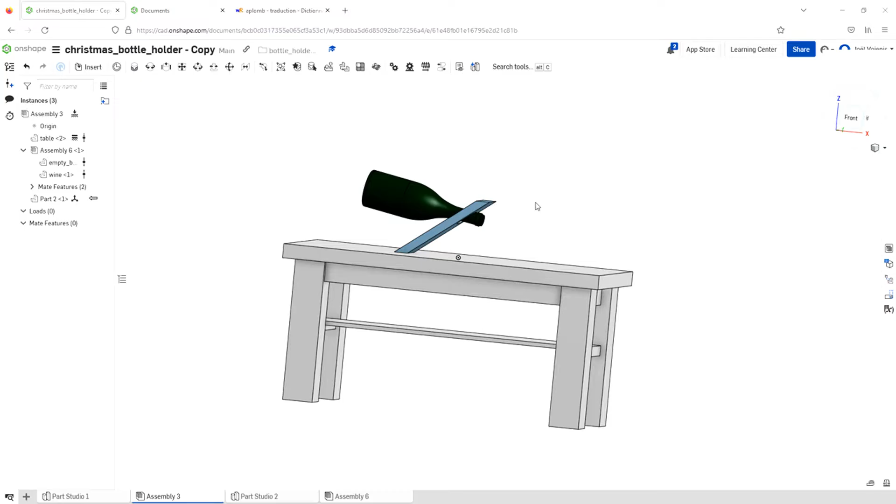In this video, we are going to see how to build a bottle holder like this part.

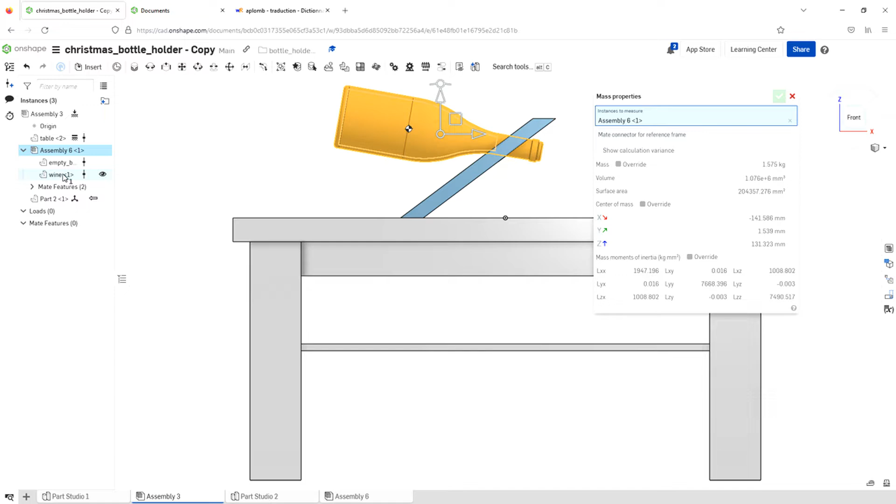There's an equilibrium because when you choose the front view, you use the display mass property button. You select the assembly composed of the empty bottle and the wine, and you add the bottle holder, the center of mass stands right to the vertical of this surface. Otherwise, there wouldn't be equilibrium, it wouldn't be balanced.

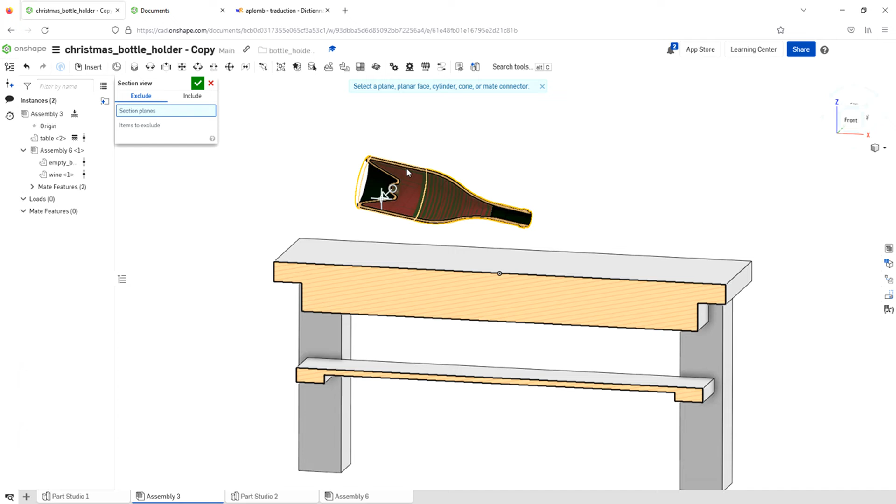Use Onshape to create a bottle holder. The first step is to position the different parts. So the table is fixed, as you can see this little symbol, and the assembly containing the empty bottle and the wine that we can see when you use, for instance, the section view. So there's a wine inside, you can see here.

So the bottle and the wine is a sub-assembly, so it can be moved using the arrows, depending on how you want your bottle to behave.

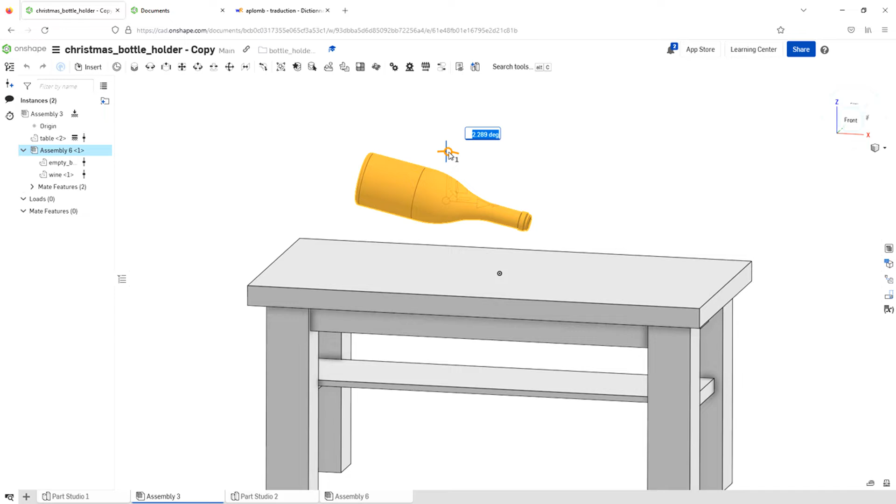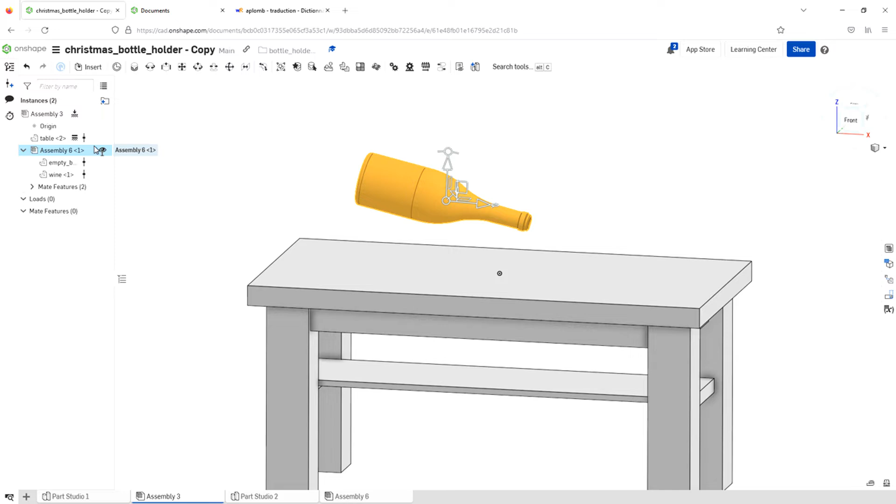Now that the bottle has the good position, it looks like it floats in the air, we are going to build a new part studio using this icon. Let's choose the origin here. And we enter a new window where the different parts and sub-assemblies are transparent.

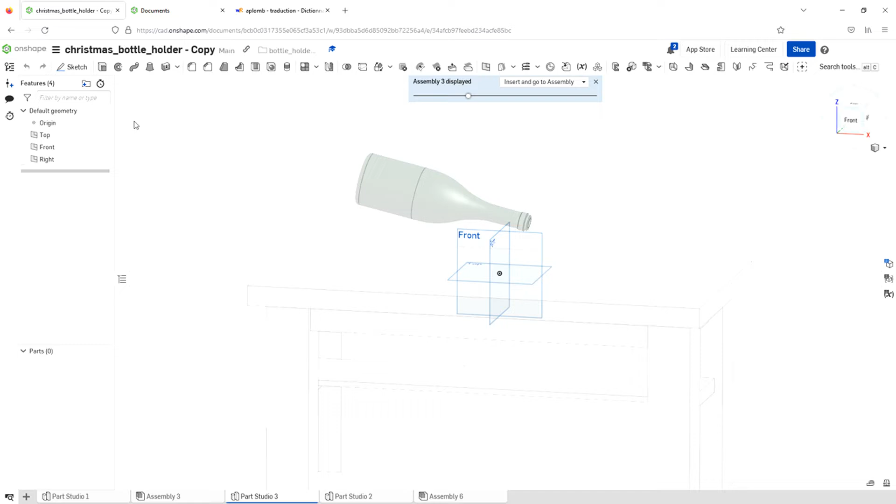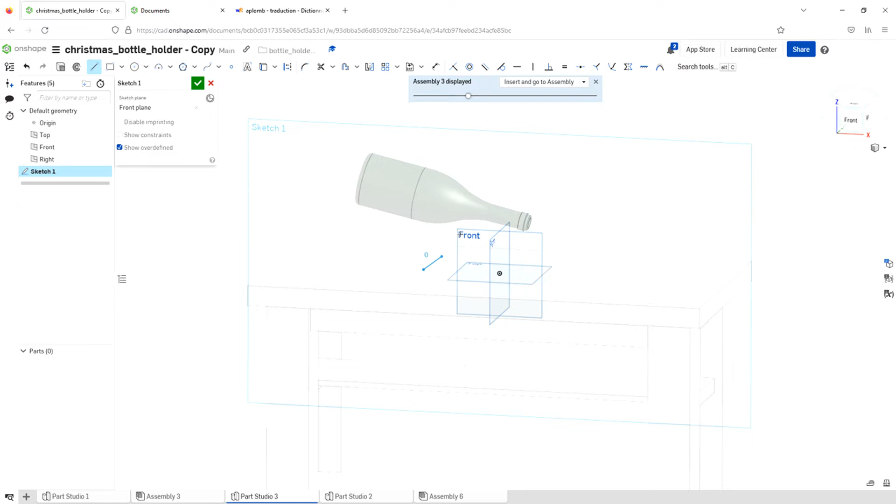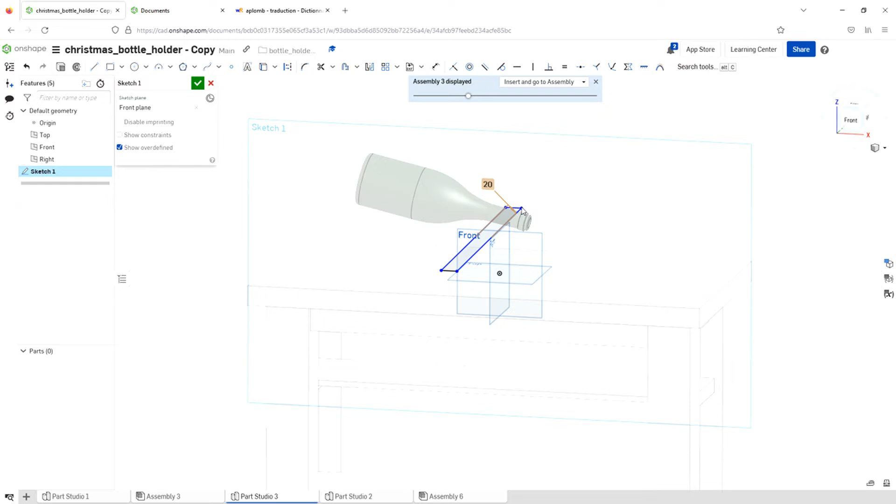We start a sketch, choosing the front plane and drawing segments. These segments must be parallel, so you can choose this function and select the two segments. You have to be sure the width is 20 millimeters, otherwise you change using the dimension button. Now you can change the position of the shape.

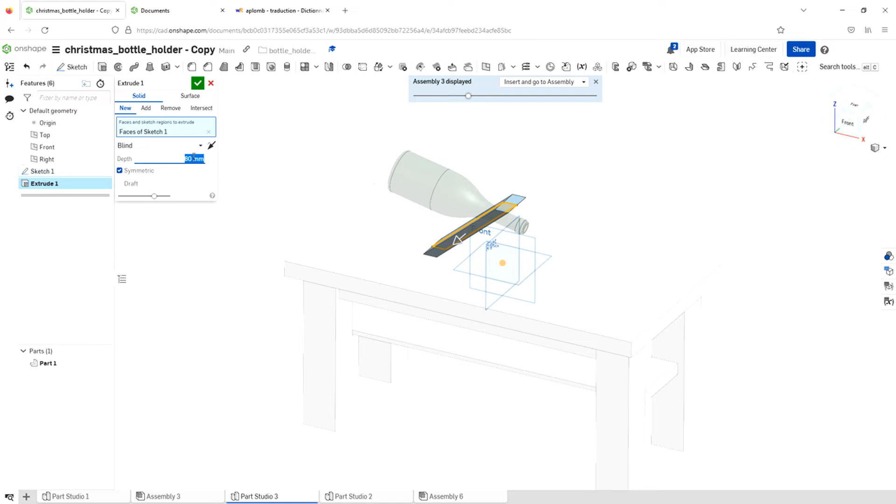And we are going to create a volume using extrude, clicking on symmetric. Let's choose, for instance, 80 millimeters width, and the volume is done.

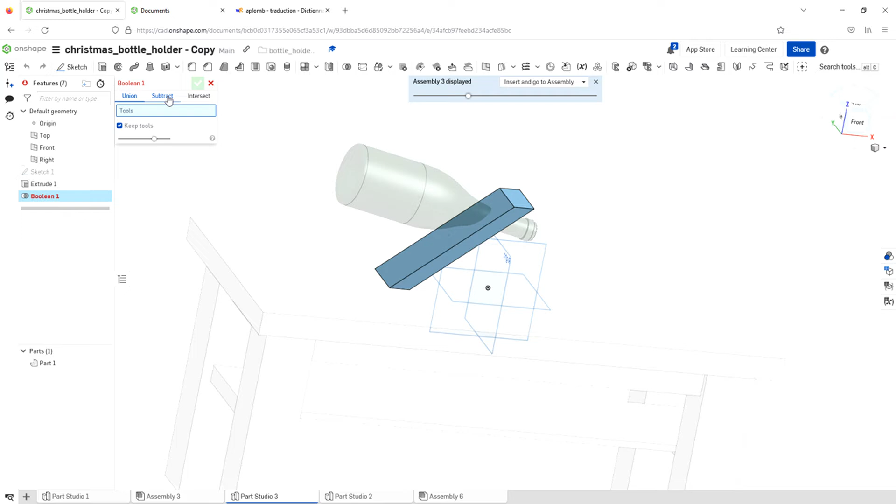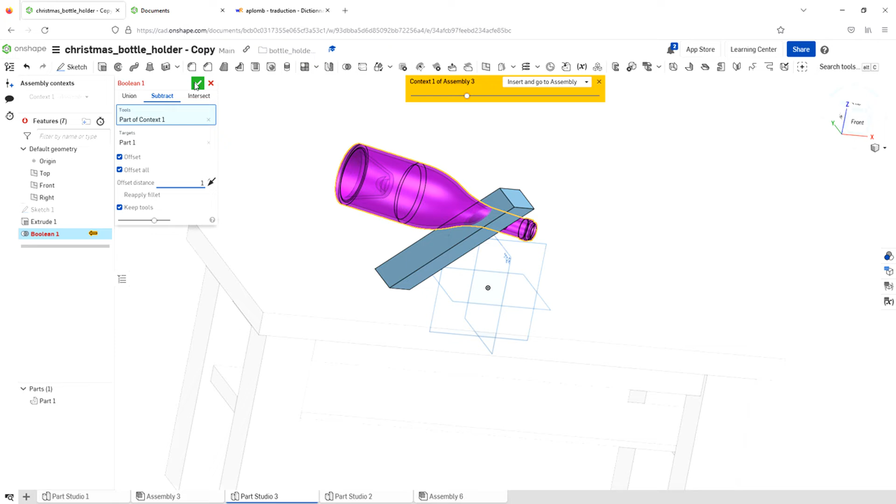The next step is to create a hole, allowing the bottle to go inside this plank. It should work with this function, using the subtract menu. The tool is the bottle and the target is the plank. Unfortunately, it doesn't work. Let's see. We choose an offset of all the dimension in order to give room to the bottle. But there's an error message here. Doesn't work. So we clear this function and we have to use a trick.

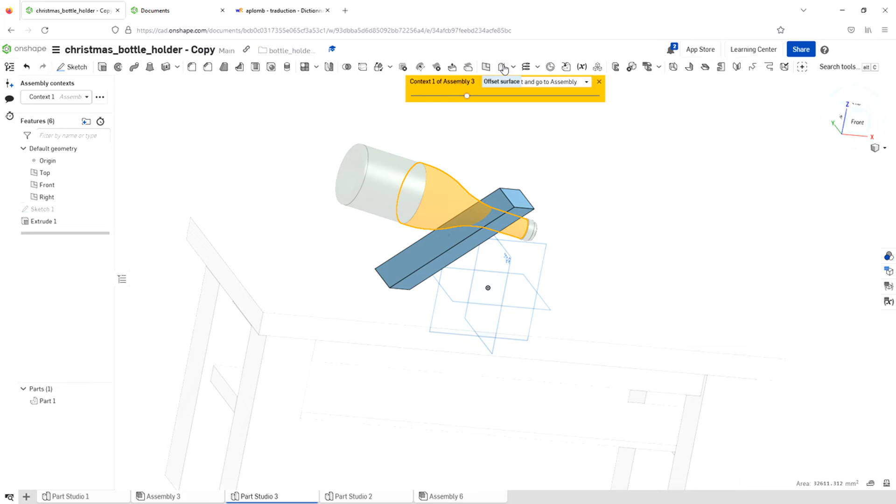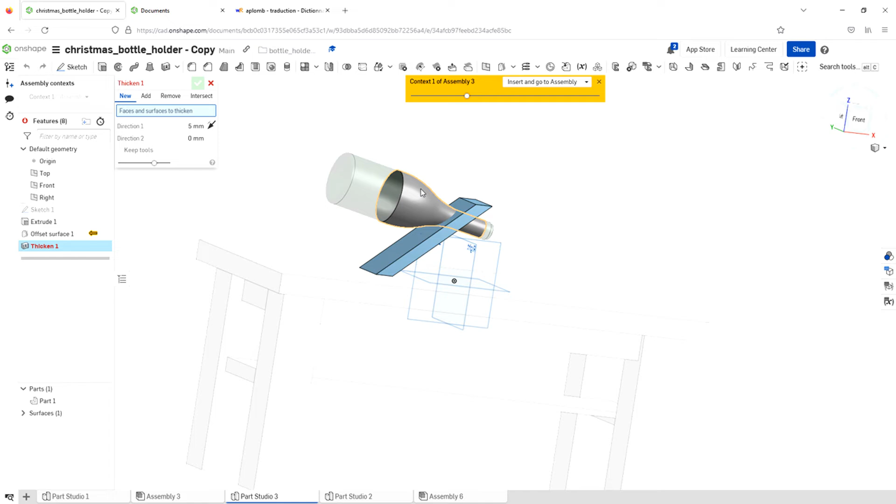The trick consists in making a surface out of this surface using, for instance, 1 millimeter offset in order to give room, and we are going to give thickness to the surface. And I will create a volume out of this surface using the thicken icon. So we have to choose this surface, choose the opposite direction, and let's say 5 millimeters would be enough. So you can see there's a volume here.

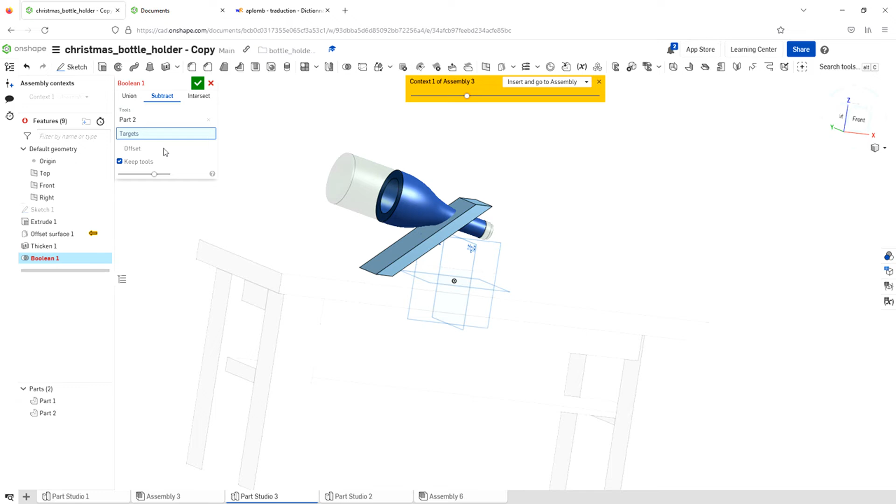Now it would work with the Boolean function. So the tool is still the thicken number 1 and the target is here. I think it's working, because if you hide this part, you can see there's a hole inside.

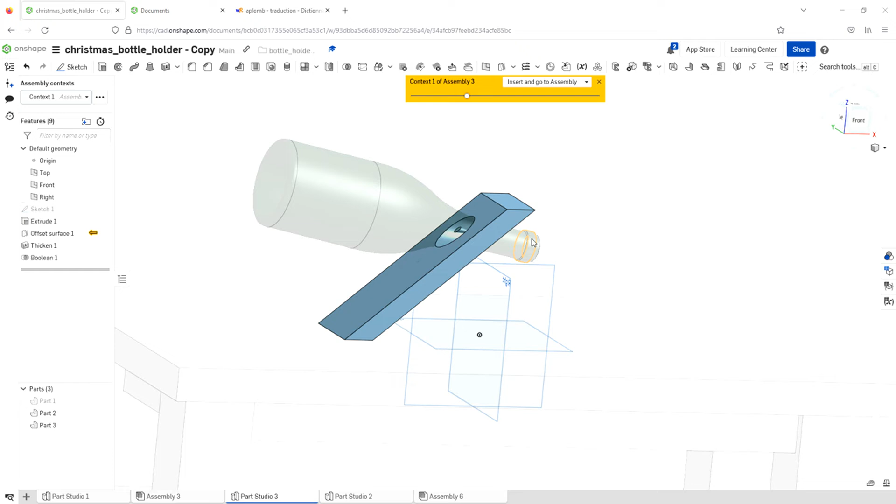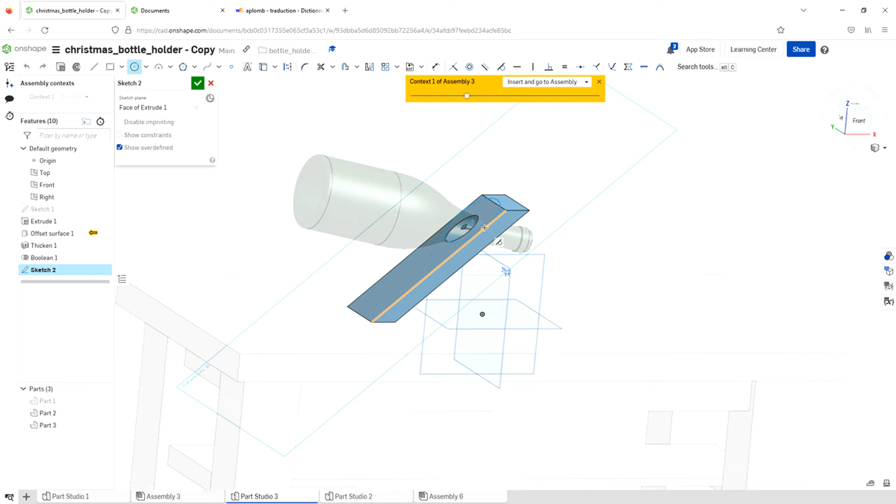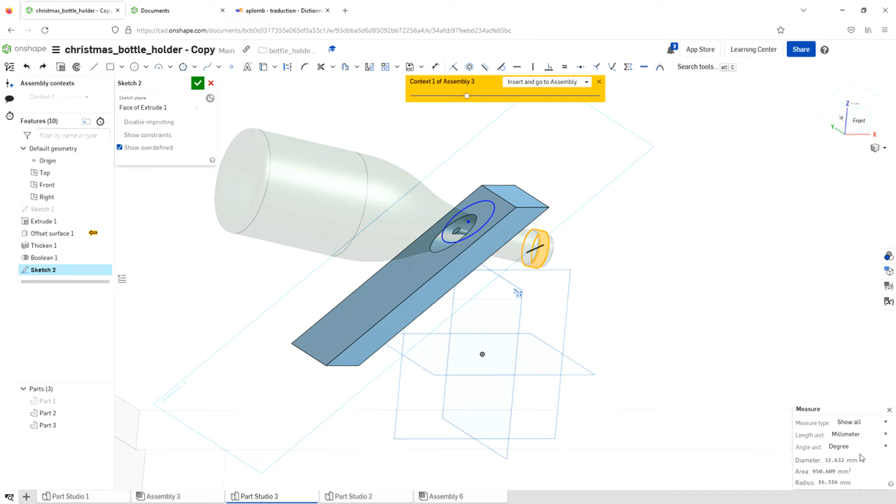The next step is to create a hole allowing the bottle to enter the holder, because as you can see there's a collar, and the diameter of the collar is probably bigger than the diameter of this hole. So we have to create a hole choosing this face to create a sketch. And now we can draw a circle. So the diameter of the circle has to be bigger than the diameter of this cylinder. So let's measure this cylinder, choose this cylinder, and the diameter is 32.6 etc. millimeters. So we have to choose a diameter of, say, 36 millimeters.

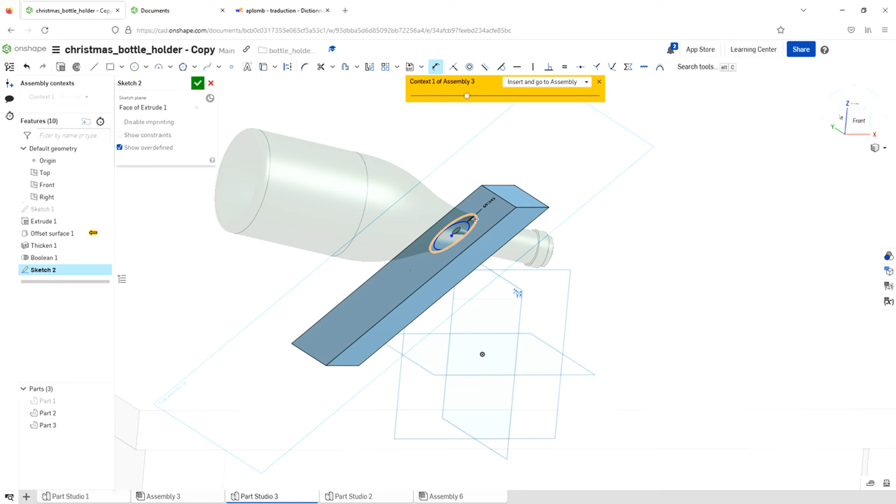The center must be, say, from this edge 40 millimeters. It will be possible to change afterwards.

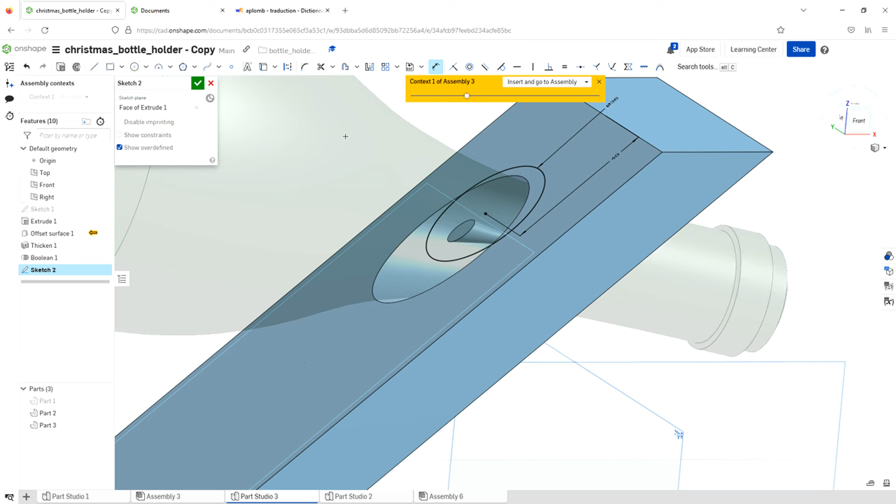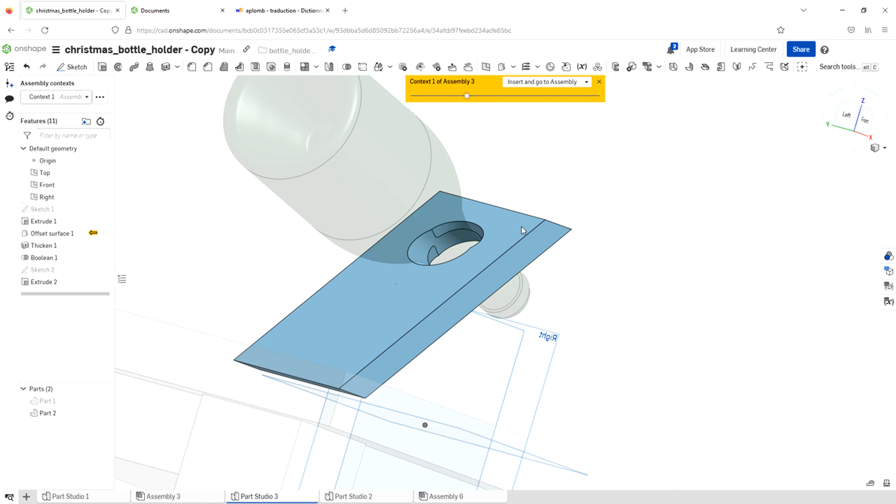Now that the circle is done, we can create extrude function, removing the matter, and it's done. Now you can enter the bottle being perpendicular to this surface, and it will be blocked into this position.

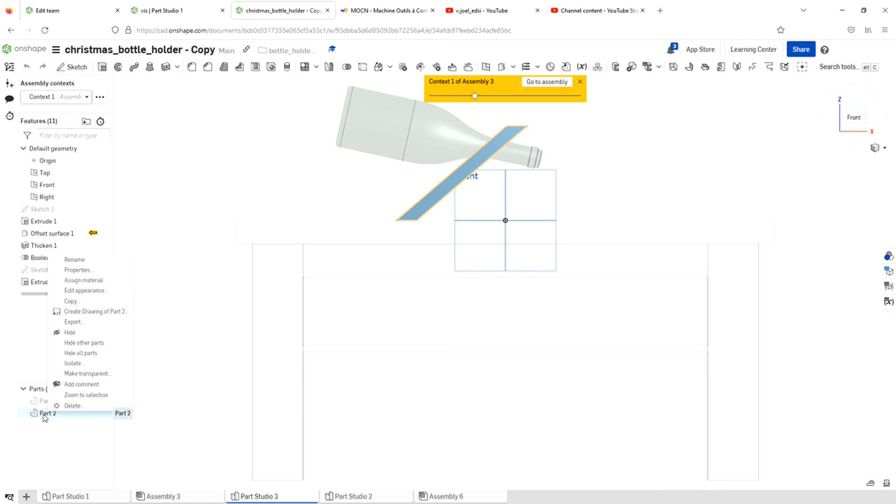Remember, we have to check if there's an equilibrium. Before going further, we must define the material used. So in this menu, you choose part 2, corresponding to the bottle holder, and assign material. So we have high density fiberboard, and that's done.

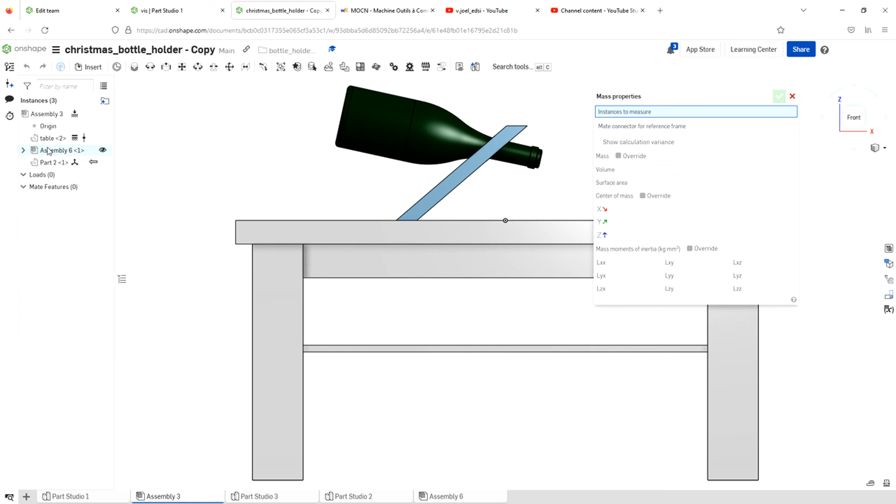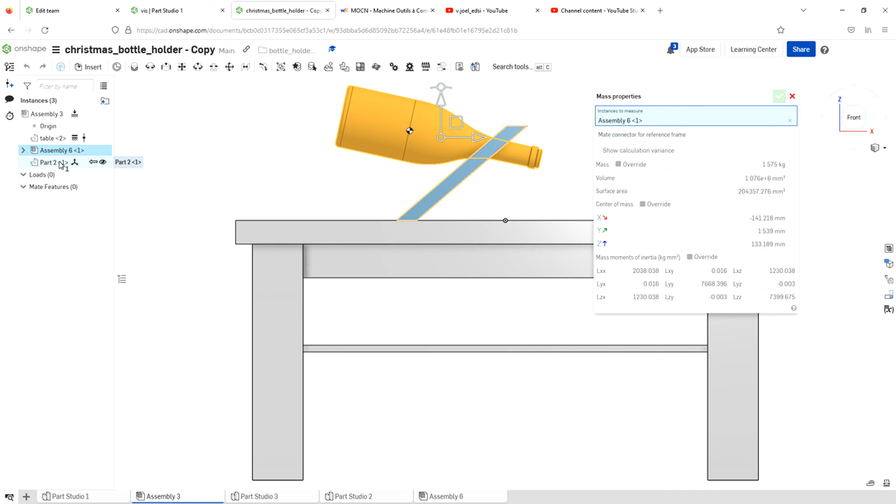Now we can move back to the assembly to check the equilibrium. Now we can see that the center of mass stands right to the vertical of this little surface. That's okay. That's what we wanted. If we exclude, for instance, the part 2, you can see the center of mass has moved. Quite logical. So that's done.

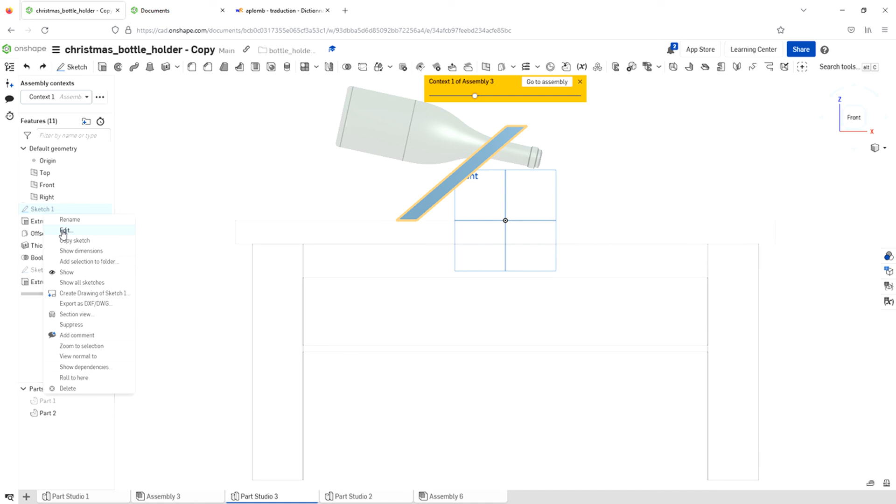It is possible to modify the shape of this part. Just 2 clicks on this part and you enter the edit mode. Choose the sketch number 1. Right button click on the mouse. Choose edit. And now you can drag this vertex and click, and that's done. Of course, in my case, it wouldn't work, so I come back to the last position.